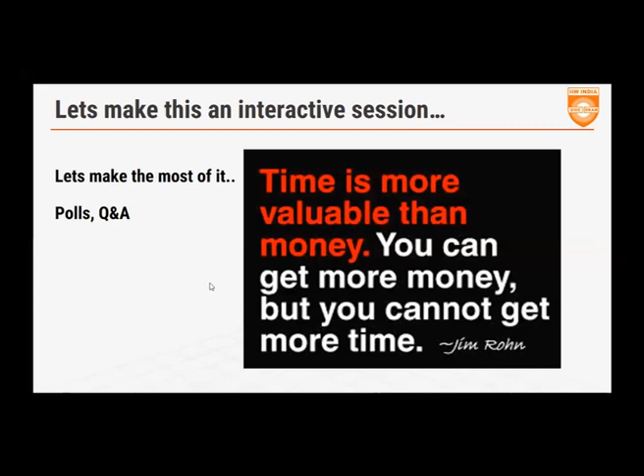Thanks a lot. So we got used to these polls and we know how to approach them. Moving on, we are all here to understand how to increase productivity in GTAW or TIG. The program today for the next hour will take you through how to move from manual to semi-automatic, how to increase speed in your manual welder itself. Then if you were considering automation, what are the reasons you would want to automate, and based on that, the challenges you would face in automation to approach, basic tools that are available for automation, and then putting those tools together - how can we have some simple automations, complex automations, robotics, and we'll also touch upon cladding solutions.

If this also doesn't meet your need for speed, then we do have a process which will take about 100 times faster than the existing TIG methods. We will look at it at the end.

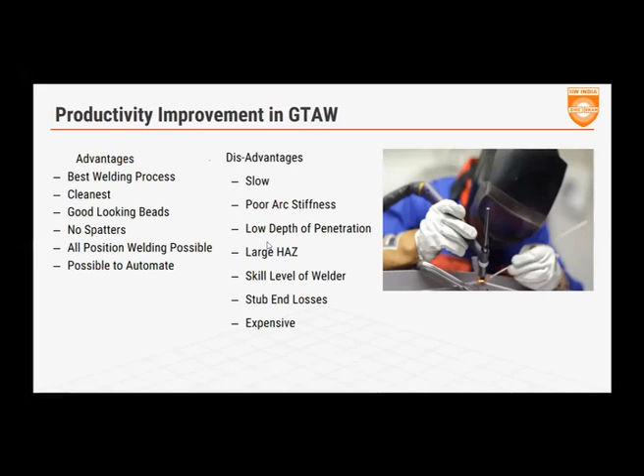Can we make it more cost effective and faster? Let's see. So the first tool that we can look at is, at the moment, what happens when you are welding on the shop floor? What challenges do you face?

The filler metal is manually fed, so the operator is feeding the material by hand, as you can see here. You would use different sizes of filler material for root, filling, capping passes. That means you would have to store multiple kinds of filler rods with you - 1.6, 2.4, 3.2 - depending on the pass.

You would have frequent start stops at the end of each filler wire. When the welder finishes the wire, he'll have to stop, pick up another one. Once that cut length is over, again he has to stop, which leads to a lot of post-process grinding as there are overlaps. Each time you stop and start, that overlap part will have a little high point. You would have to grind it off. And chances of lack of fusion, lack of penetration at overlaps are highest, because whether the upslope, downslope was matched properly, whether enough fusion had happened at that time.

Again, stub end losses, very critical. Your typical cut lengths are 1 meter. If you look at the last 4 inches that the operator cannot reach close enough, he has to throw them away, which means about 100 millimeters for every meter. That's close to 10% of your raw material purchase, consumable purchase gone in scrap. Also, this needs a helper.

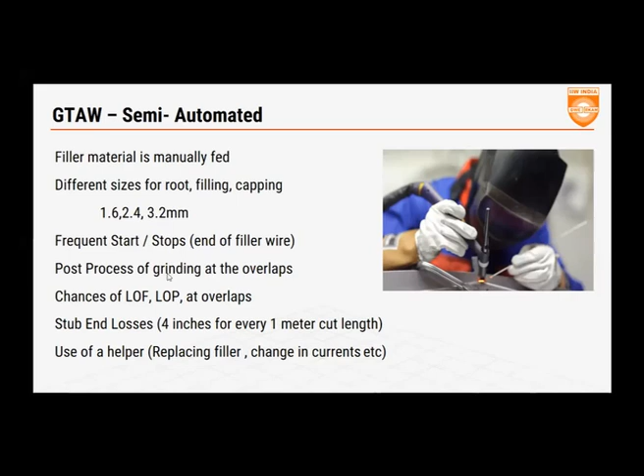Some welders require helpers to help them with the filler wires, some require them to change currents and things like that. Can we somehow help increase the speed?

If you look at cold wire feeders - what are they? They are tools that help you feed the wire continuously like you do in a MIG welding application. However, here the same filler wire that you were welding with in cut lengths is now available in a spool. You would feed the wire through the liner on top of the torch or through a manually held pen. It increases the speed of welding.

It reduces your stub end losses. At the end of the spool, you may have about 8 meters of wire, the length of the liner, which would be nothing more than a couple of grams for a 15 kg spool that could have gone to waste. Whereas in your regular cut lengths, every 10% is going to waste.

It can simulate pulsing. This tool can do everything that your welder has a habit of doing. Welders have a habit of feeding the wire in and out of the pool as they're used to. For more skilled welders, the equipment can simulate pulsing for you - it can start the wire at a speed, pause for a time, start again, pause.

It can be done. The welder feeds in the wire only once the peak current is reached. So once you finish your upslope and have had a smooth start and reach the peak current, the pool is ready - at that time you start feeding the wire into the pool.

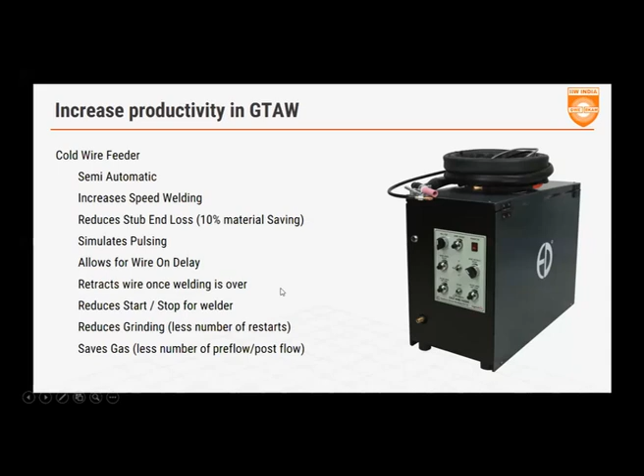Another tool is the hot wire. If you look at this schematic, you have your traditional TIG power source - it can be any power source. One end connected to the TIG torch where your arc happens, and the other earthing connected to the workpiece.

Now, if you were using a cold wire feeder, you would use the wire feeder. The feeder would feed the wire through the pen or the torch tip and enter into the molten pool. This is how it would work.

Now, if you wanted to increase your productivity, you could preheat this wire before it enters the pool. If you preheat the wire, the melting point goes down, allowing quicker deposit rates. The hot wire power source could be connected straight at this point here and to the job. The longer this extension, the more the heating of the wire can happen - it creates a resistance through which the current flows.

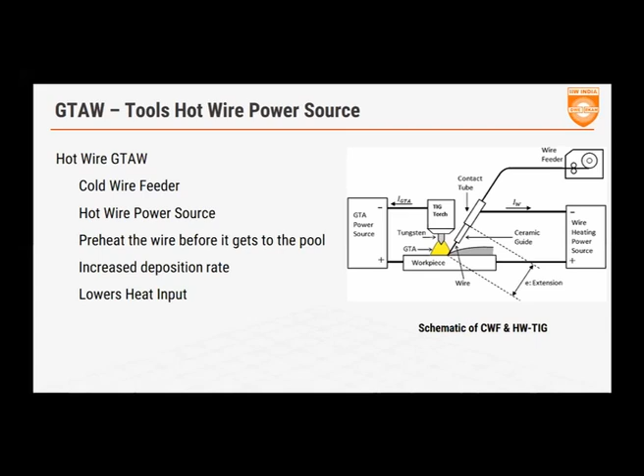This allows you to add wire, and the wire would melt at a lower current or lower heat input. Therefore, the average heat input on the job goes down and your deposit rate increases.

By how much? Typically when talking about manual welding, we're looking at about 200 amperes at best. So you're looking at cold wire fed at about 10 to 12 grams per minute. And when you do the same with hot wire, you're looking at about 20 to 25 grams per minute manually fed, which means you will have a significant difference in your productivity.

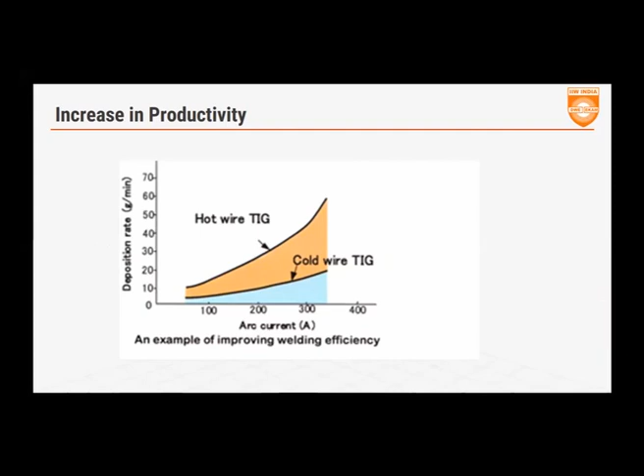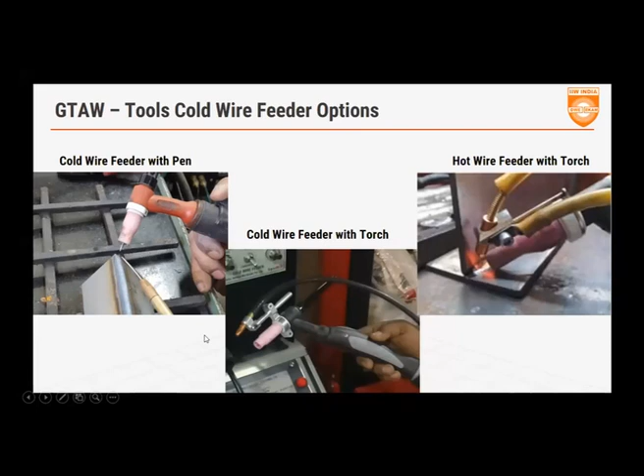As you can see here, the welder is holding the pen the same way he holds his wire at the moment, so there is no change of skill set for the welder. The way he holds the pen and the way he holds his existing wires are the same. Therefore, it makes it very easy for the welder to learn how to use this tool very quickly. Within a day or two's training, he could quickly get up and running.

This gives productivity increments up to 25 to 40%. You could also use the single hand torch if you wanted to, and the welder would have to get trained for it. This would help you get the wire fed directly from one hand.

This is very interesting and important when you're welding in an out of position weld. So if you're welding a pipeline and you have to weld on the 5 o'clock, 6 o'clock position, this gives a lot more confidence and help to the welder, as the other hand is more free.

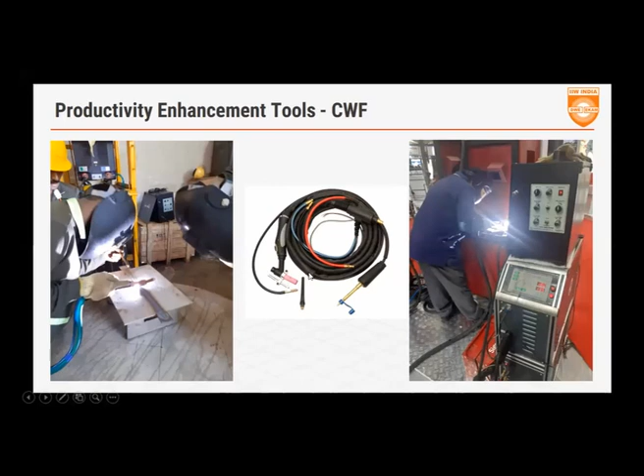This can be mounted very comfortably onto any existing setup of your TIG welding machines on your shop floor. It could be any technology, any of the imported machines, the standard thyristors or Indian machines, or it could be the other older generation machines. This is an independent tool that can mount onto any existing setup and helps you get going in as quick as a day.

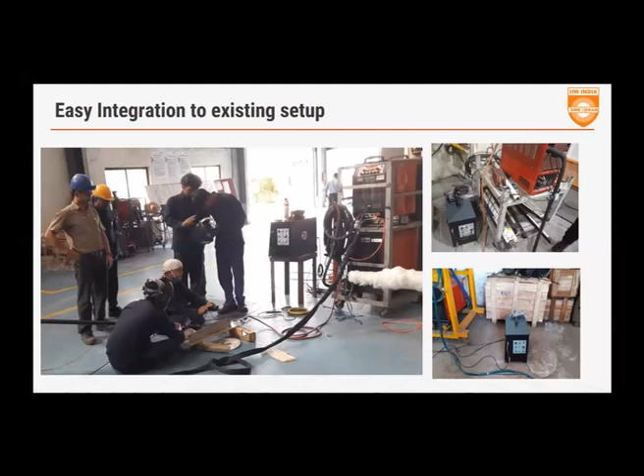So if we were to look at how much productivity improvement is expected from manual intervention or using these tools, you can see a small experiment on about a 150 millimeter length fillet joint. When welded directly by the welder using a 1.6 mm filler wire and a preset current of 138 amps, he could complete the joint in about 110 seconds.

Now, we kept the same current range, we kept the same fillet size, and we introduced the cold wire feeder. The welder was feeding the wire at about 900 millimeters a minute, equivalent to a wire volume of 1.6 at this rate, and the welder could complete the job in 96 seconds. This is because the wire was coming on clean to the job, and 1.2 requires a lot lesser heat to melt than 1.6.

Same thing when we added a little bit of hot wire to it, adding about 40 amps current to the hot wire. You see the increase in deposition, the wire feed rate went up to 1100 millimeters a minute, and the joint was finished in 80 seconds. So a nearly 30% improvement on a 150 mm length.

If you increase this length to about a meter or more of weld length, the number of start stops in the manual process increases because the filler wires have to keep changing. This is where this will be very, very useful and can increase productivity anywhere between 20 all the way up to 40% for the manual welder.

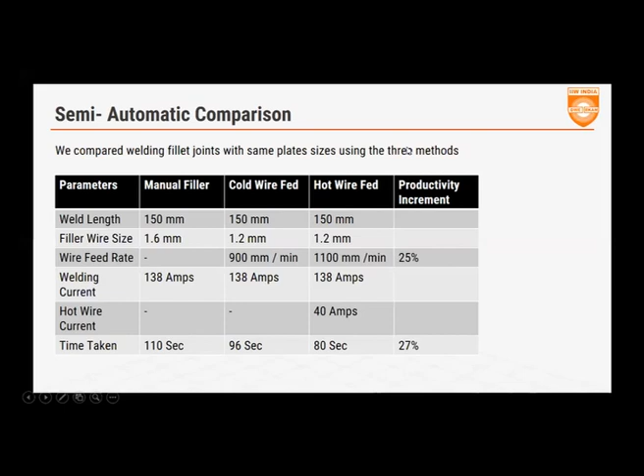I hope this part is clear to you. At this stage, we can take a few quick questions if there are any. Let me see what is happening.

Mr. Subramaniam asked about stub end losses being overcome by welding the new wire onto the earlier one, and also about pen feeders. The typical trick of the trade by welding two wires together will also give you a 2-meter length, but if you're welding for a longer period, the 15-meter spool would help you weld much more continuously than tacking two wires together. You would definitely save on stub end losses, reducing it from 10% maybe to 5%, and that would continuously work.

Mr. Gandhi is asking the difference between cold wire and hot wire. In hot wire, the wire gets preheated before it enters the weld pool. That means you have already preheated wire entering the pool, reducing the temperature, and the current or heat required for it to melt.

Mr. Anil Singh is asking about it without any manual intervention. I think most of these have been answered now.

What is the maximum current that we can use in hot wire GTAW? You can go up to 40, 50. The power sources are allowed to go up to 80 amps, but practically when you go into cladding, this is used much more because the speeds are higher. Typical current ranges of about 40 amps on the higher side would be comfortable.

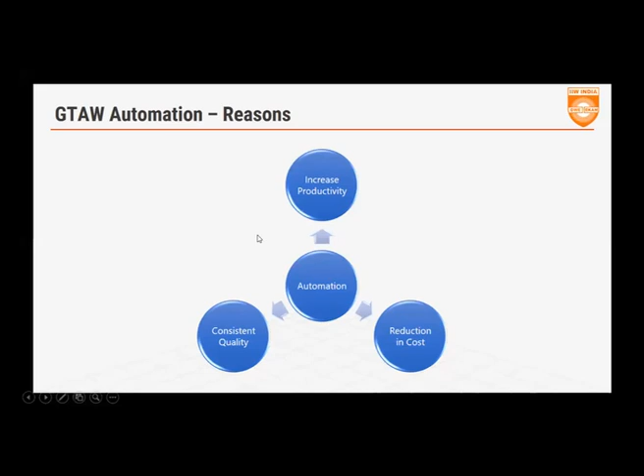Considering these three during your initial phase is very important. What are the types of challenges you will face when you try to get into automating TIG? One is the edge preparation - whether you are grinding or beveling, you have an equivalent root face. What is the tolerance in the root face when you do fit ups? Are there mismatches, ovality, uneven surfaces, or a thin sheet with a bigger diameter like in most distillery sections? You have shells of about 1 to 2 meters, but thicknesses no more than 4-5 millimeters. There you will have a lot of ovality when you put it onto one surface. Or you want to do rectangular rounded edge tubes or hydraulic ports - one tube, multiple ports to be done, such odd shapes to automate.

Excuse me for a second, I'll just have a sip of water. Thank you.

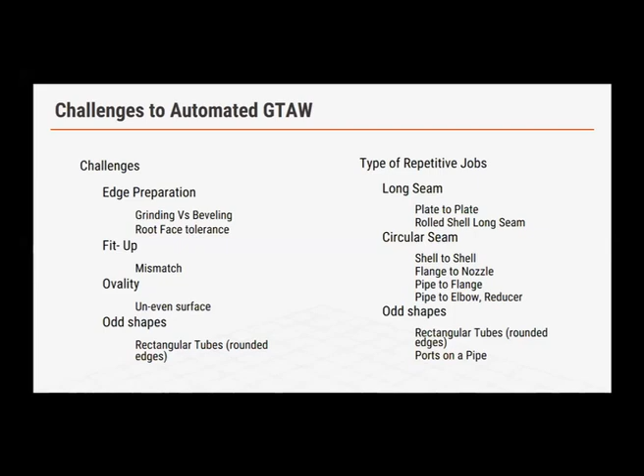So the kind of repetitive jobs you can consider to automate - one is the long seam. If you had plate to plate joints, rolled long seam joints, these are typical long seams which can be automated. Circular seam joints - shell to shell, flange to nozzle, pipe to flange, pipe to elbow, pipe to reducers. Then you have floats, locks, objects which are repeated in nature and have circular seams - they can be automated. And you have odd shapes like hydraulic ports, a classic example, multiple ports, circular but in one line, more than one axis to weld, or you wanted to weld rectangular tubes.

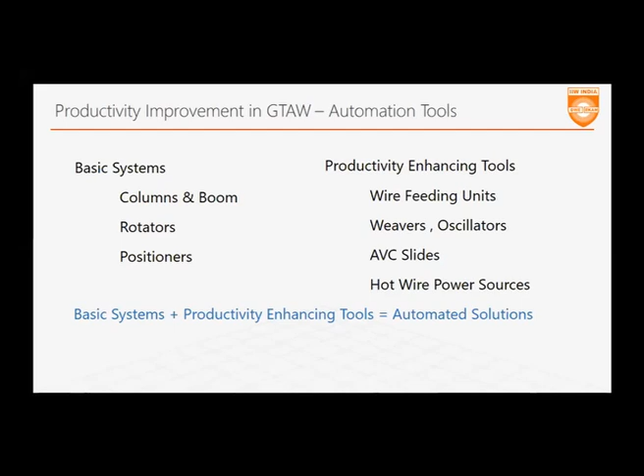So how do you go about automating? You take some automation tools and you have some basic systems. Your basic systems could consist of column booms, rotators, positioners, manipulators - these are the basic systems. Then you have your productivity enhancing tools - cold and hot wire feeders, weavers, oscillators, AVC slides, and hot wire power sources. When you mix all of these together for the right application, you can have an automated GTAW solution for you. Let's look at these tools one by one first.

If we look at cold wire feeders, what we discussed earlier - you have a motor which could be a geared motor, a stepper motor, a servo or a pancake motor, clubbed with a feeder. It could be a 2-roll drive or a 4-roll drive, and you could have single or twin wires that you want to feed through these.

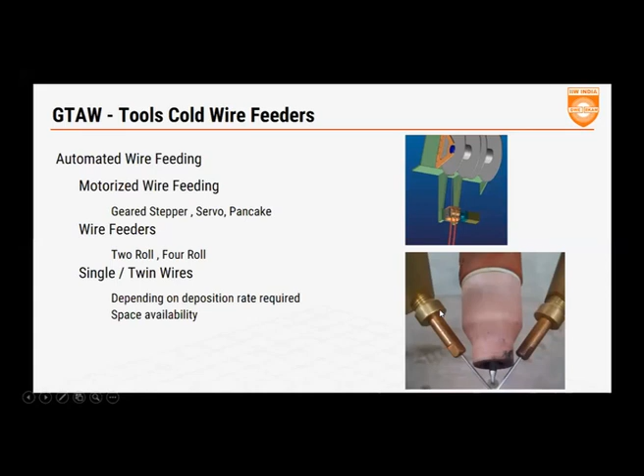Now, if you were to do a twin hot wire, what does that mean? You would have twin wires. The torch is fixed, for example, on a boom, and the job is moving in this direction. Say it's a circular seam and you are rotating the job.

This would be the leading wire that is coming into the pool, just at the outside of the weld pool. This would be the trailing wire, getting inside the molten pool already, well within the center of the pool. This is how the setting would be.

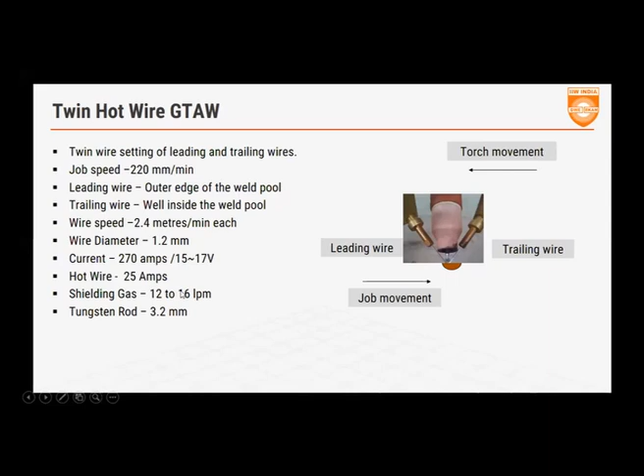If you look at a typical job speed of about 220 millimeters a minute linear welding speed, 2 wires, each fed at 2.4 meters per minute, wire diameters of 1.2 millimeters. Mind you, this is already on automation. Current levels were at about 270 amps, hot wire currents of about 25 amps, shielding gas argon at about 12 to 16 LPM, and tungsten was about 3.2 mm.

What was the result? If you did the same job with only a cold wire feeder: same 225 amps, 15 to 17 volts, 150 millimeters per minute travel speed, wire feed rate about 1.9 meters per minute, which roughly translates to about a kilo per hour. We added just a hot wire to the single wire. By adding a hot wire at about 20 amps, we could increase the travel speed from 150 to 180 millimeters a minute, getting the same bead height, and increase the deposition rate from 1 kg per hour to 1.15 kgs per hour.

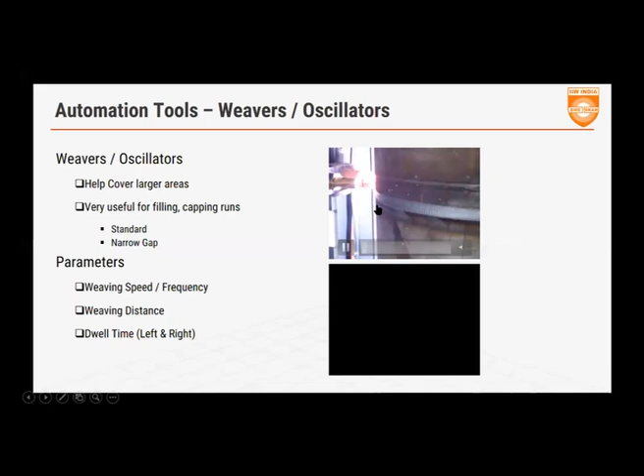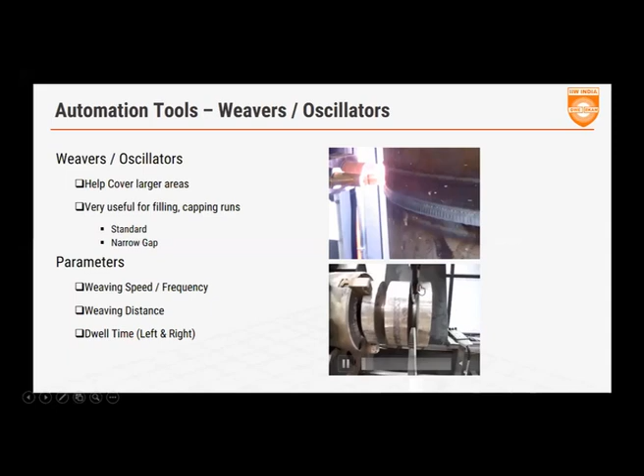So what do we mean by weavers and oscillators? These are tools available for us to cover a larger area. You can see in 2G the torch is moving upward, downward. This is also valid for narrow gap. So if you look at the joint here, you would want to do a narrow gap with an angular weaving.

Now, in both these cases, there are a few parameters you can set as a user. You need to set the weaving speed or frequency at which you want to weave. You could set the weaving distance, what bead width you wanted. And very important is the dwell time, which allows you to avoid lack of fusion on the sides.

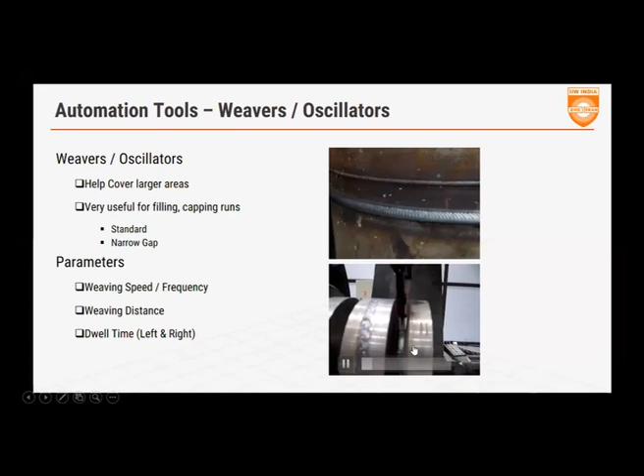So you see when the torch is moving on either side, it's pausing for a second or so - that pause is nothing but the dwell time. It's settable on both left and right, and this ensures you don't have LOFs while welding on narrow grooves, or even when doing multi-layer welds.

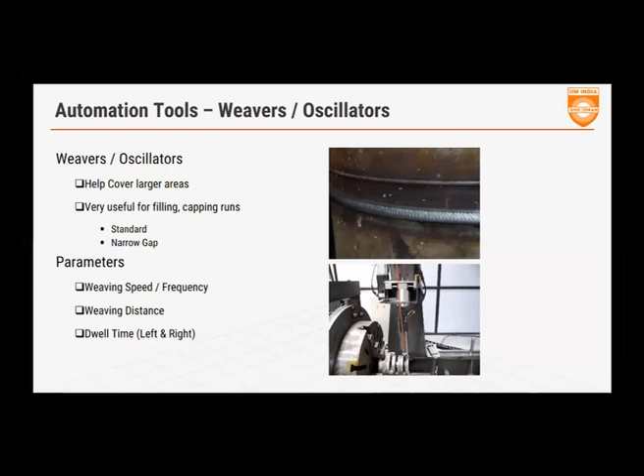The next and very important tool is called the AVC. A lot of you might have heard about it already, and some of you are definitely using it. It's called automatic voltage corrector. It regulates the welding voltage precisely to give repeatable procedures.

Now what happens is, typically when you have a lot of ovality as we were sharing, or uneven surfaces, the distance between your torch and your job would change. As you go through it, it's changing the distance. What happens is we measure the voltage very closely. Those who know what happens when you move a torch closer to the job, your voltage reduces. And when you take the torch away from the job, or the distance increases, your voltage increases.

We capture this feedback, take it into a fast loop system, and on sensitivity index, we control the motor of the slide. This helps you trace any profile that you want while maintaining the same arc gap, which means you would no longer have to worry about your tungsten getting dashed in because the ovality is too high.

If this moved on without the AVC, somewhere along the lines here, you would have the tungsten make a very big gap and it would burn through. And here you would have had the tungsten hit the job and cause damage or require a repair. AVC avoids all this and allows you to do automation in TIG much easier.

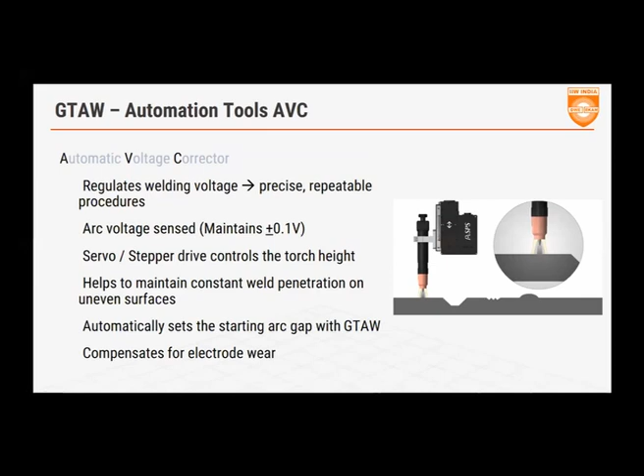Another important factor is it also allows you to compensate for electrode wear. This is very important when you're doing cladding solutions, when your arcing is on for more than 8-10 hours. At that time, if your electrode has worn out, the arc gap will change and the voltage will increase. This will automatically bring your torch closer to the job, thereby maintaining the same voltage that you wanted.

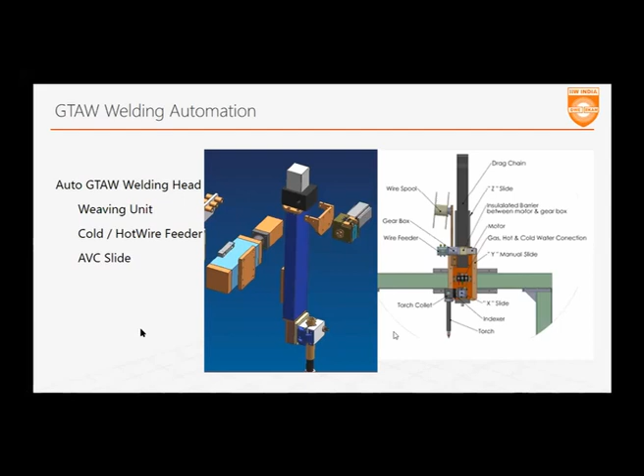Now, this is when your job is over here and rotating, in a 1G position weld. This is true. If you're welding in 2G, your torch would be pointing on this side. This axis would become the weaving axis, and this axis would become your AVC axis, allowing you to adjust the gap from the job while this allows you to weave. So depending on the position of the joint, you can change the axis in your program to change the AVC and weaving roles that you wanted to play.

Very important considerations when you look at automated GTAW welding are: what is the size of the part you want to weld, what is the repeatability of the job, what are the chances of inconsistency in your edge preparation or fit ups. Have you done a time motion study? That means what is important to know is what is taking more time, welding or handling the material. This is very critical when you do any automation. This is something you should understand, and then take your next decisive step, because it will help you understand which next step to take, whether to go in for a robotic solution, or an SPM based solution with single station or multi-station.

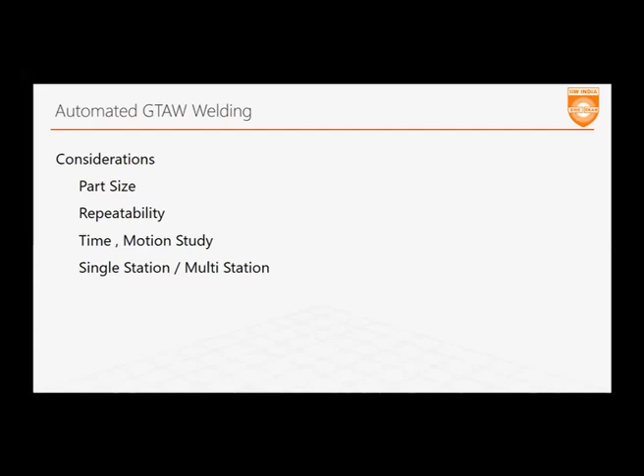We'll see a couple of examples here. I've put in a few slides for straight tube butt welding lines for boiler panel tubes. Similarly, we have done titanium tube to tube welding systems, joining two tubes together. Big shout out to the team from Godrej, who are already present on the chat. I know we've done this for them. And you have butt welders or spooling operations where you can do pipe to flanges, pipe to elbows, reducers.

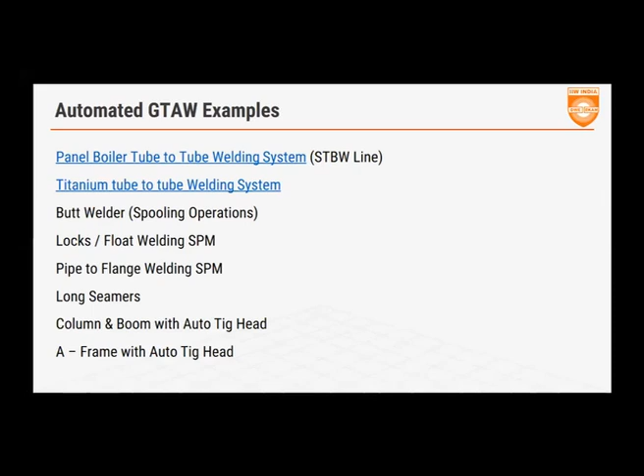You can do locks, floats, welding SPMs. Now, as the parts are smaller, loading and unloading times can be longer, so here we'll see something that can help you save time. Then you have pipe to flange solutions, valve solutions, long seamers, and we'll show you how this goes on to a column boom for an auto TIG head or an A-frame in general.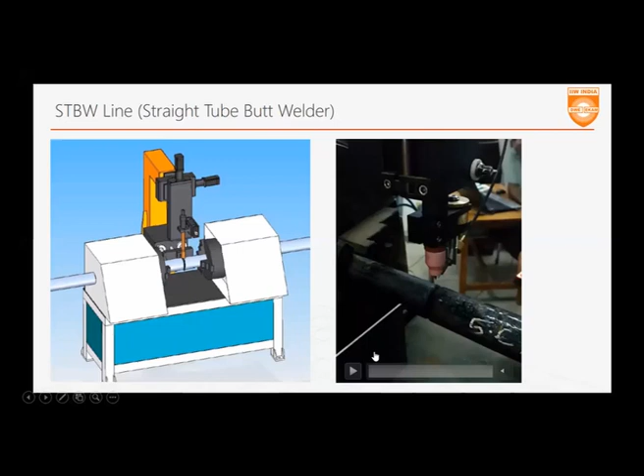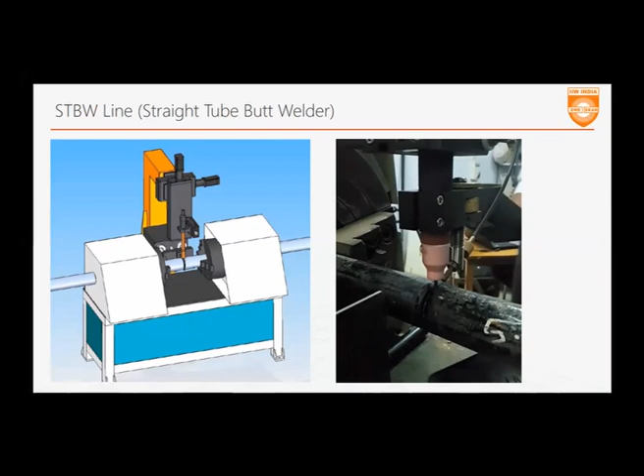So you see a touch retract happening here, wherein the torch is approaching the job. When it touches, the beauty of AVC is the feedback. It tells you that it has reached the destination, goes up by a fixed distance that you want to set, and then starts the arcing. This will repeat itself every single time.

You can have the start point at 3 millimeters, 4 millimeters, depending on the voltage you wanted. You can clearly see that the torch is weaving. You can see that the wire is being fed directly into the pool and that the job is rotating in this direction.

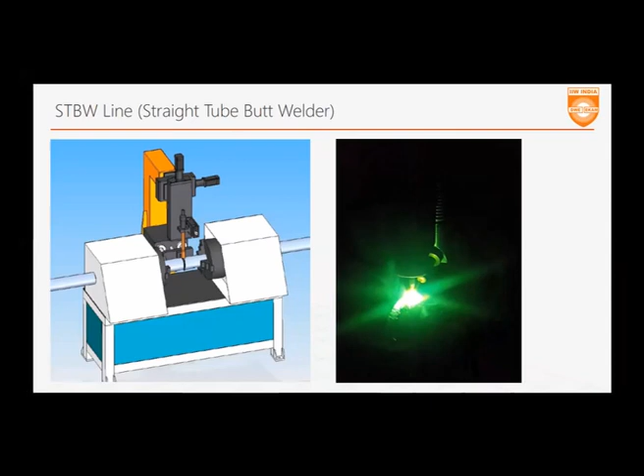Now, as you can see here more clearly, when 360 degrees are about to get over, you will have a slight overlap which you can program up to 5 degrees, 10 degrees, depending on your job. At the end of overlap, you are seeing now a downslope happen onto the job. You can see slowly the current going down and the wire has retracted, thereby not having any inclusion in the sticking of the wire onto the pool itself.

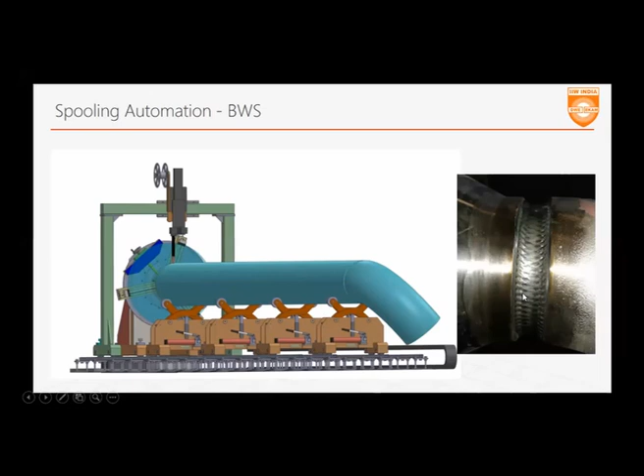Now this is a spooling automation or a butt welding system. This is very useful when you have larger spools, flanges to pipes, pipes to elbows, elbows to reducers, and the entire spooling system. This is one of the beads you can see here welded, one of the passes with the wire, with weaving, beautiful bead here.

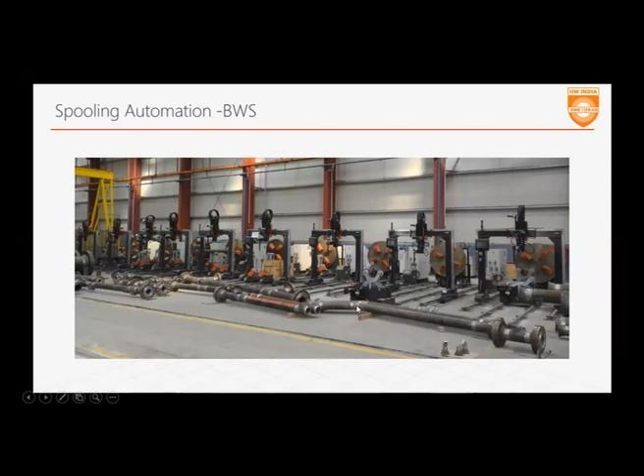You could see a series of maybe about 10 to 15 of these butt welders on the shop floor here. These are the kind of spoolings that we were talking about. So you could do pipe to flange to pipe, these butt joints which are heavy wall thick, and it could help you do them. It could help you do the elbows, the reducers.

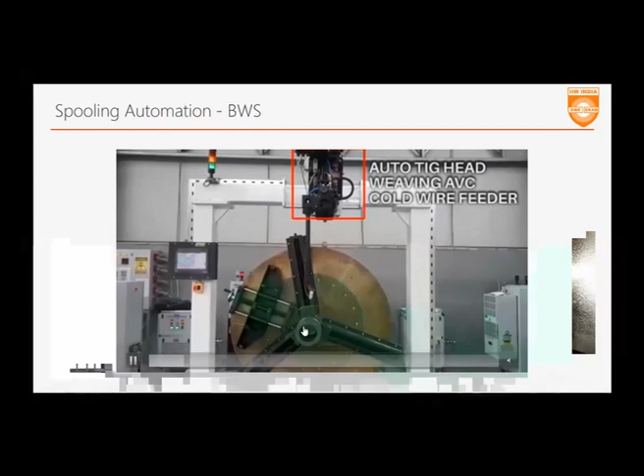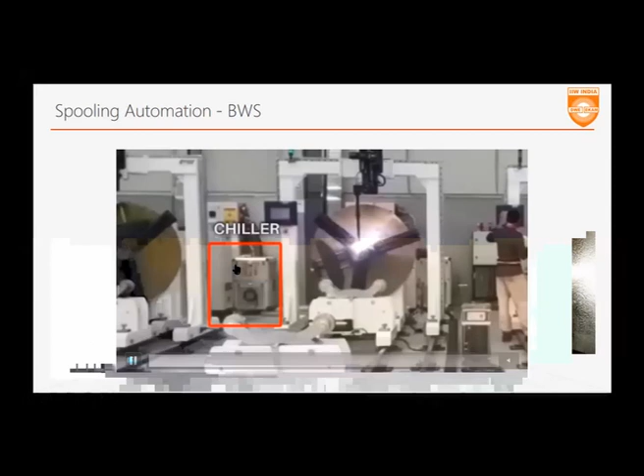How does this work? I have a quick video to show you that. Now this, if you see here, is the 3-jaw chuck which will hold the job for you, the pipe or the elbow. And then you have the power sources, the idlers here, so if you have a longer joint, you can rest the job onto it. The chiller keeps the torch cool.

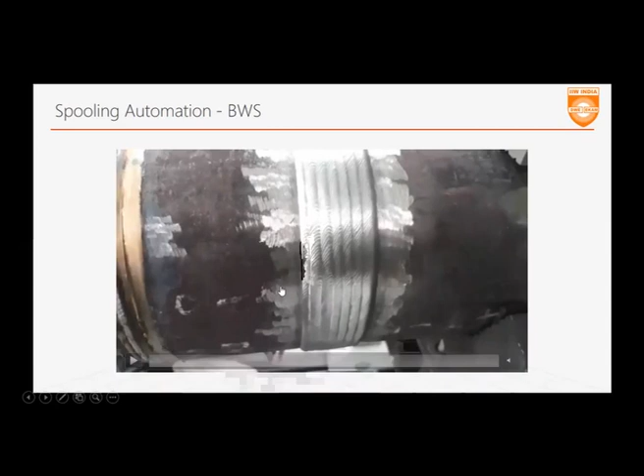Now here is where the torch is working. The operator is just looking at the job being welded. This is the kind of weld joint or overlay you can expect on this. It has pre-programmed, so once you put in the diameter of the pipe, it will maintain a linear speed. Once the 360 degree is over, it would move on to the next one, weld the next run, next run. It will keep doing it on its own with minimum intervention by the operator.

When you're doing multi-pass, when the second pass comes, because of the AVC, it will again maintain the same arc gap and maintain the voltage that you want.

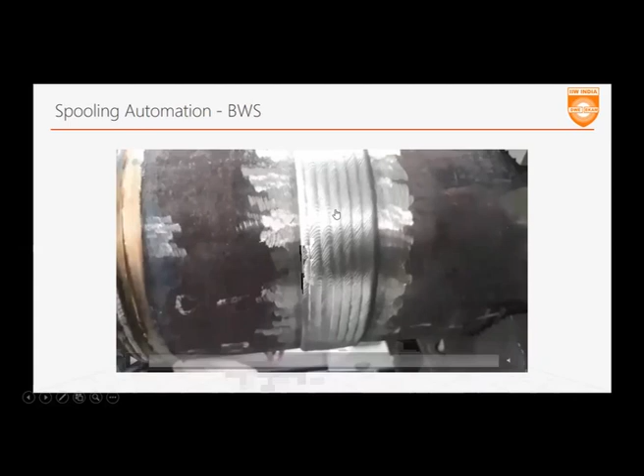Now let's see a pipe to flange example. Now these are two different SPMs. Here you see one where we have raised the entire tailstock to a 45-degree angle. What does that help you achieve? It helps you achieve welding in 1G position.

Again, that solves a lot of your problems of mismatches. Now, if you have welded this in a 1G position and the torch was at 45 degrees, any mismatch or any gap which was inconsistent between the pipe and the flange would reflect in two dimensions, X and Y axis both. When I'm moving it 45 degrees, any mismatch is in the Z axis only, and my AVC can take care of that particular mismatch by arranging or reaching closer to the joint.

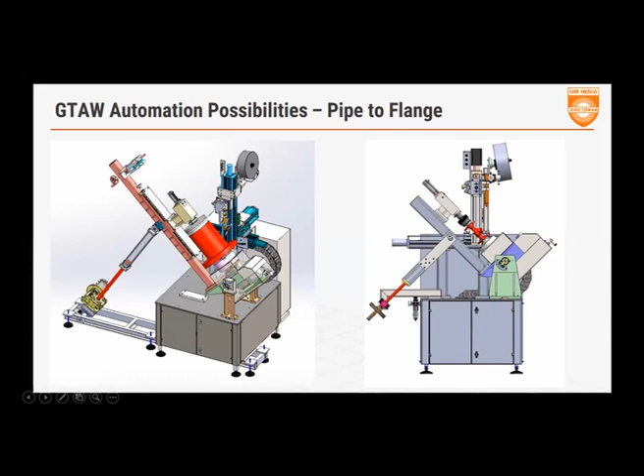Same thing here, you could do it, it's a valve being done. You can see the flange to pipe, pipe to the body, valve body to pipe again, and then to the flange. Two settings, and you can do four joints on it. These two are butt welds and these two are fillet joints.

How does the end product look like? Now this is where you can see you're welding the three pipe to flange joints here, already pre-welded for you. You can see the result here. What if you had a narrow gap, like we saw the valve, it has a fitting coming out of it, the Y coming out of it doesn't allow you a lot of space.

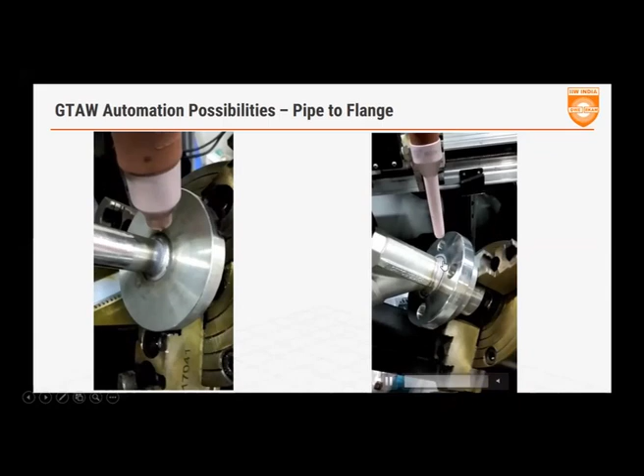So we can have special torches and nozzles for reaching such places. AVC and other tools help achieve that weld joint, which seems difficult to automate, possible to do very comfortably. Let's look at smaller stations.

If you had a smaller product with smaller weld time but higher loading and unloading time, you could load the job on one station. The operator loads it and gives a 2-hand acknowledgement onto the job, which allows it to be clamped. Once clamped, it rotates to the other side, ready to be welded. While the torch goes down, touches, retracts, and starts welding, the operator can remove the pre-welded job, put in the second job, and set it up for welding.

Here you can see a lock being welded, with welding speeds at about 800 millimeters a minute and sheet thicknesses in the tune of 1.2 millimeters. By doing a pipeline here, one being welded and one being loaded, the operator is free to work at an easier rate, and productivity improves since your equipment is never kept idle. It's always occupied.

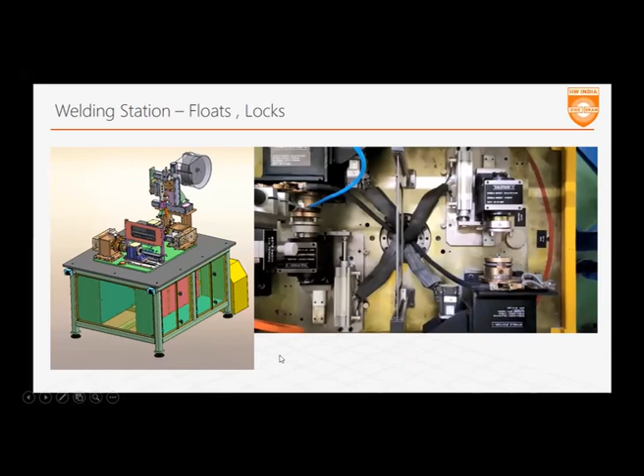This is a typical long seamer. If you were to do plate-to-plate or a shell type joint, this is the kind of long seamer you would have. This axis is the main gantry on which the welding head moves left to right or right to left. On top is the torch mounted, with one axis here for weaving. This axis becomes AVC, and the cold wire feeder is fed through this.

What's interesting in the long seamers is the kind of fitments you have to hold the pipes or plates together, because welding attracts a lot of stresses. It will either push the job away or pull it closer. To avoid those shrinkages, you have to have the right set of clamps to hold it.

This is a pneumatic muscle with fingers all across the length, 50 millimeters each. If you had a 6 meter long piece, you would see about 120 such fingers next to each other. When the pneumatic swells with air, it puts pressure onto the clamp and the fingers hold onto the job, holding it tight every 50 millimeters so it doesn't move. These are copper based for heat removal.

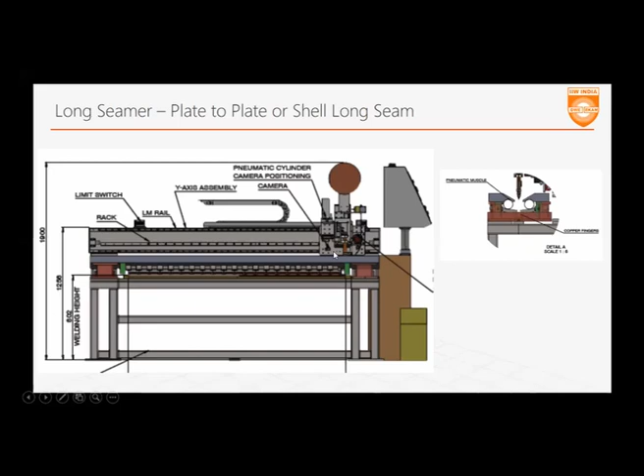You can have a purging base here, and a prefixed groove to fill the geometry of the penetration - all done on this face. This whole length is welded straight on, again with the same three tools: AVC, weaving, cold wire feeder. It could be hot wire as well, depending on your job.

If you had an existing column boom setup, with a trolley, column, and boom, you could mount a TIG welding head on top of the boom face. This is a headstock, tailstock setup. If you had a spider-based system, you could even have simple rotators on the base instead of a headstock, tailstock, which rotate the job. The head does the same thing, welding in 1G position, making life easier for the welder.

As you can see, this is a huge shell, about 3.2 to 4 meters in diameter, being rotated, with hot wire and the GTAW power source being fed directly.

The new advantage of this automation is that the welder and the helper now become one. The welder has the convenience of not having to handle a cockpit of multiple stations. He handles one tab, one remote to control his wire feed rate during welding, his AVC controls, his weaving length, and his rotational cycles, all on one panel in front of him. Makes life much easier for the welder.

We can add a weld camera to this, which allows the welder to see the weld joint and, during welding, see the pool while sitting in the convenience of an AC cabin or down by the bench, not necessarily right in front of it.

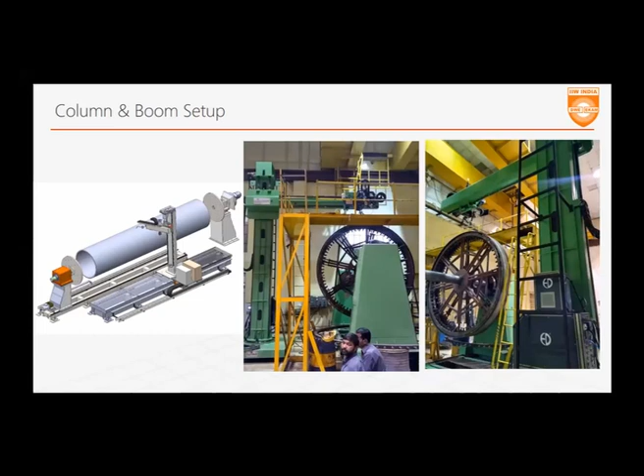This takes away the fatigue from the welder and allows him to do repeated jobs at a higher speed.

The same long seamer could have the TIG head mounted onto an A-frame, as shown here. So if you had a pipe with a flange, a reducer, another connection or a socket to weld, you could move the head very comfortably. You could weld long seams on this. You had your shell rolled, put it on the idler, set the seam right, and then move the torch from one end to the other while welding the long seam.

You could have weaving in this axis, as you can see, and AVC in this axis for the long seam. To do the circ seam, you would have weaving in this axis, and AVC here. This you can see is a 300 nominal bore pipe with 8 mm thickness being welded in two passes.

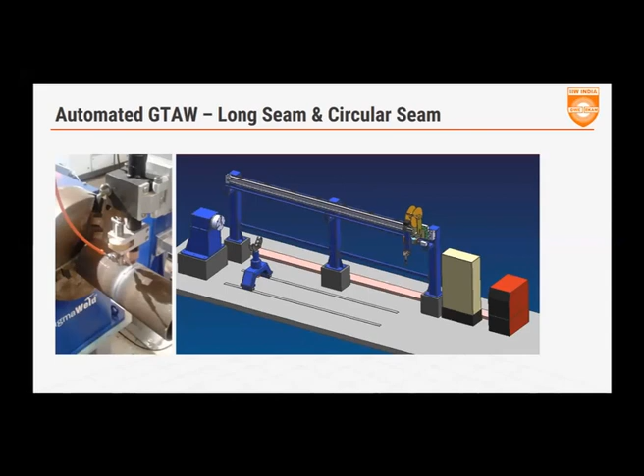Root with the filler wire, and then the capping. Ideally, in manual welding, it would have taken 3 passes.

Moving on to cladding stations, we have 4 kinds available for cladding overlay: the vertical cladding station, horizontal, universal, compact cladding stations, and you can also have RTJ groove cladding stations.

This is a vertical one. You can put the job here, the job rotates, the torch goes in and welds at every end. Again, AVC, weaving, cold wire, hot wire fed, single or twin wire.

This is the beautiful machine called the Universal Weld Cladding Station. As you can see, this is the positioner or rotator in zero position when working as a vertical station. If you wanted to do a horizontal job, you could raise the positioner up by this hydraulic arm, and it would become 90 degrees.

You could load the joint. This would swivel down here and go straight inside the job and do the work. Welding, either a butt weld, ID cladding, or anything could have been done by that head. Again, same all three mechanisms. The beauty of these systems is they can interchange the AVC and weaving systems as they go along through the program itself.

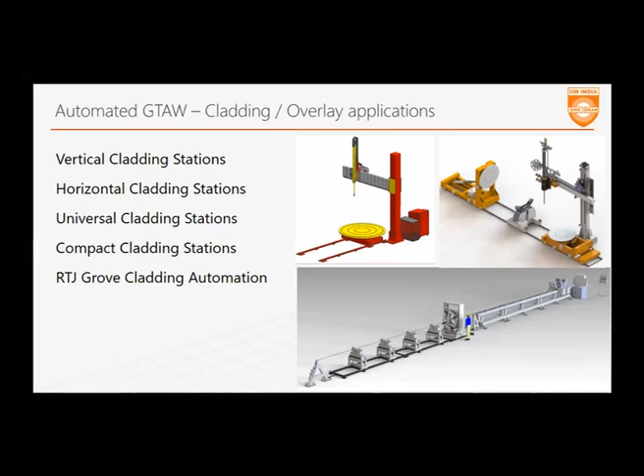Then we have a huge horizontal cladding station here. It could be 3 meters, 6 meters, 12 meters. You can have single head, twin head, quad head - all possible depending on the job you want to do.

Let's look at a vertical cladding station. You can do jobs like elbows. You can see here very small grooves, so for a 2-inch ID, 42 mm, you could want to clad, you could do that. You wanted to do your flange face and the bores, you could do that. You want to do your T-joints, you can do that.

These are all overlaid with different materials, Inconel, Monel, stainless steel, onto the base material that you wanted to clad it with.

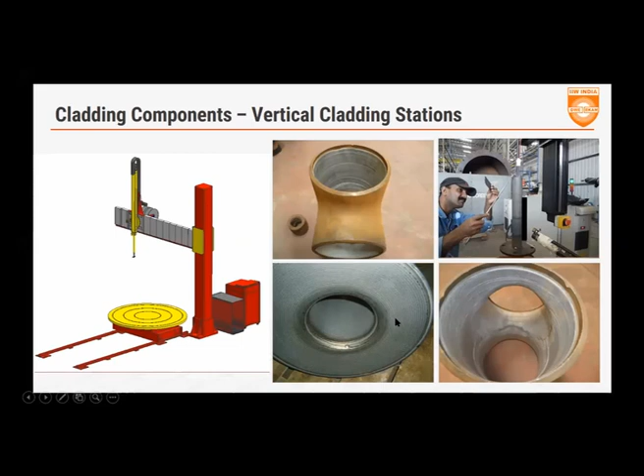Similarly, if you wanted to look at ID cladding, these stations are single and twin pipe. These are some of the cladded pipes already. As you can see here, this has already been clad, beautiful, singular layers, same height, very good to use at the end of it and easy to analyze.

Now, this is a multi-head station, you can see one torch being active here. You can see a dark patch, then you can see the second head. The beauty of these systems is imagine you want to weld a 12-meter long pipe and do ID cladding on it. If you did it with a single head, you would have started from one end and welded 12 meters continuously, resulting in disproportionate heat input on both ends, or you would have to start and stop at different lengths.

You put in a twin head, that means you weld from 0 to 6 meters on the first head, 6 to 12 meters on the second head. You get a more balanced heat input on both sides, and you can complete in 6 meters what would ideally have taken 12 meters.

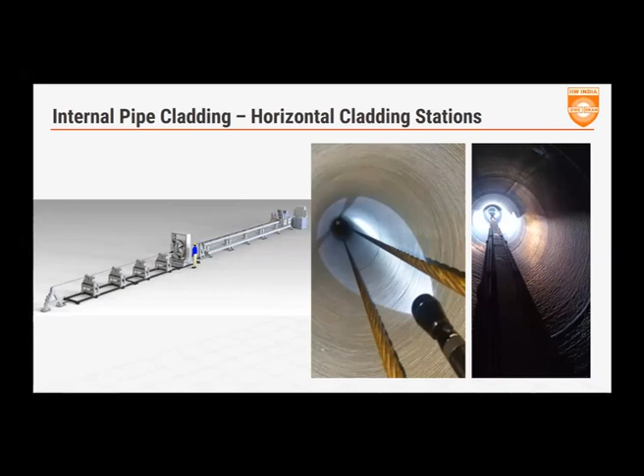Now we add a quad head to it, meaning you have 4 heads on the same station. One 12-meter long pipe could be welded in 3-meter segments. By the time you finish welding 3 meters, ideally you would have welded a 12-meter long pipe. That's the kind of productivity enhancement you can have over there.

We've covered a fair bit of automation where we have seen increase of productivity upwards of 100%, and upskilling of the welder, where the welder now becomes the operator.

You can have a time motion study in place to decide which of these would be more useful for you. It could have evaluated your welding time versus handling time. If you do that, you would know whether you need a multi-station or a single station is better for you.

And did we say overlay? Because overlay is a topic in itself, and I know I've covered very little of it. So while I take more Q&As on this, let me launch one quick poll to know whether you guys would like to have another session on cladding itself.

I'll take a quick Q&A. Is automation systems 4.0 compatible? Yes, data monitoring and documentation happens, Mr. Jinesh, that is true. Seam tracking is possible on the long seam machines, Ashok Kumarji, yes it is possible. There are mechanical seam trackers and there are visual seam trackers.

Mr. Darshan wants to know what is the minimum size we can weld overlay on an elbow. We have done up to 3 inches of an elbow. I have a video for that, and I can share it with you later.

Minimum ID pipe can be done from inside. If you were to do a very small pipe, say below 5 inches, I would recommend doing them on a vertical cladding station or a universal one. If you wanted to do anywhere above 5 inches and the lengths are up to 6 or 12 meters, you could do it on a horizontal one.

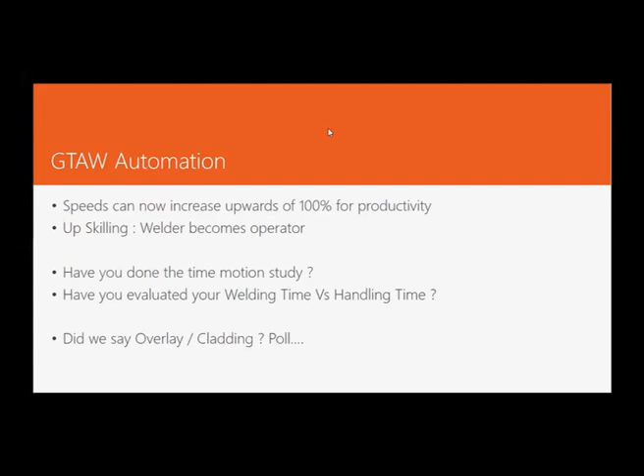If you wanted, has this met your need for speed, if I was to ask? Or would you like to have much more speed? If you wanted to do much more speed, we have a process for you which is the latest technology, called accelerated TIG, we call it SWAT, based on keyhole technology. I know I have taken up the time, but I request you guys to stick around for another 10 minutes, I promise you it will be worth your time.

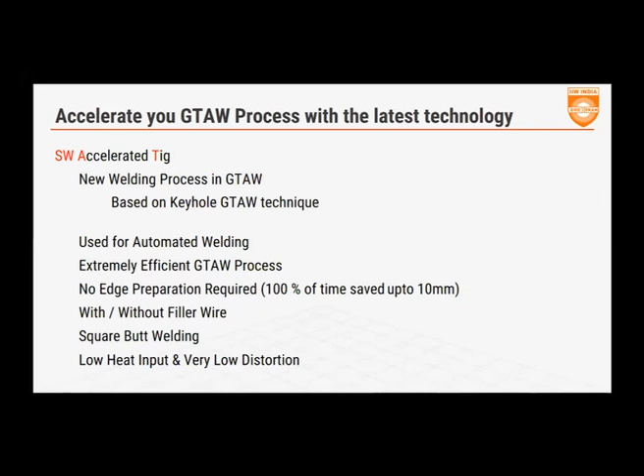Now if you look at the SWAT, it's used for automated welding only, an extremely efficient process. You need no edge preparation, it can be done with or without filler wire. It's a square butt welding, very low heat input, very low distortion. What do I mean by that, and how does this work? It works because it's a variant of keyhole technology, meaning it punctures through the entire material in one go and carries through the molten pool all across. I'll show you how: it works because we concentrate the arc, make it much more concentric, constricted, more focused on a smaller area, and it gives you much deeper penetration.

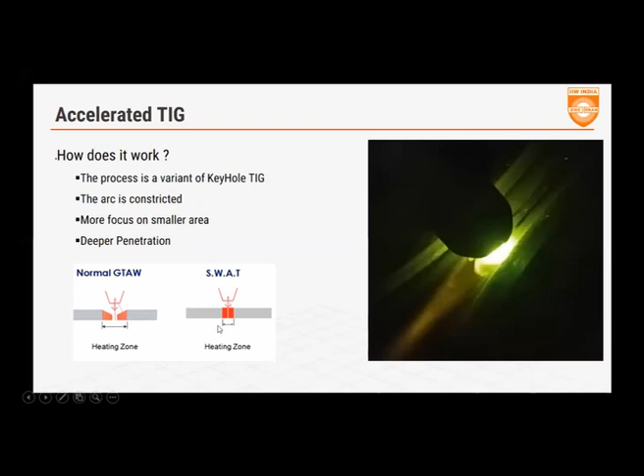If you look at the heat zone of a normal GTAW or pulse TIG versus that of a SWAT, you can see a much smaller, much more focused arc. How much focus? Look at the arc force level for the same levels of current and voltage.

So if you were doing a pulsed DC TIG between 100 and 130 amps peak current, base current at 100, net effective current at about 110-115 amps, you would have had 9.8 volts. The arc force available here is about 3.2 millinewtons. The weld bead depth would be 2.47 millimeters, and width would have been about 7.61 millimeters.

When we did the same thing with SWAT, the arc force, given the same current and voltage, shoots up right from 3.2 to 9.2. It's almost 3 times as powerful as a normal TIG arc force.

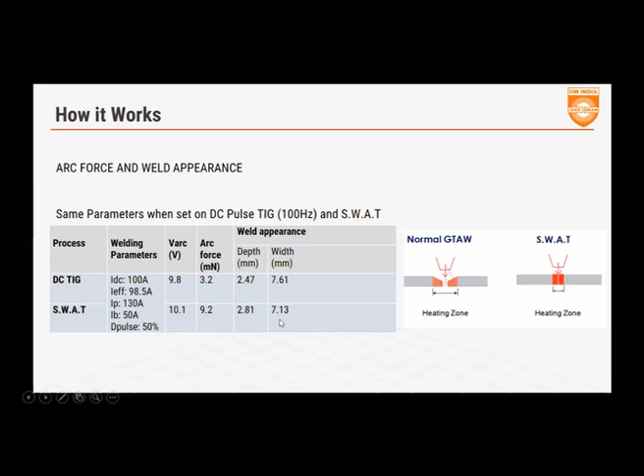But it's still a TIG process. Look at it - the depth of penetration goes up by 20%, width reduces by 10%. You have a very much focused arc, and it allows you to weld in one go. This is the kind of cross section you can expect.

We'll see much more as we move forward. Just to give you a schematic idea - two plates, butt joint put together. When you start welding with the SWAT process, the arc becomes very concentrated. Because of the concentrated arc, it creates a keyhole throughout the thickness.

The plasma and the gases are released from the bottom. As you move in the direction at high speed, the pool is continuously held on its own - you don't need a backing layer at the base. It works without it, and it forms a typical wine glass profile. No edge preparation was required to do this.

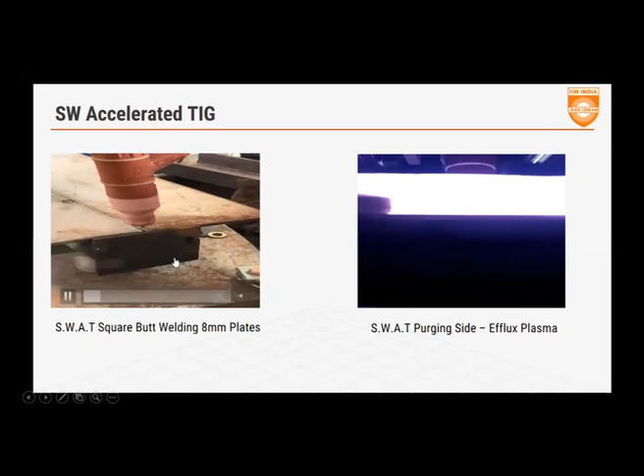So can I show you quick videos? If you can see here, this is a typical 8 millimeter thick stainless steel plate. You can see no edge preparations done. It's simply put on top, and the torch is mounted on a simple column boom. We'll get the boom to move at about 400 millimeters a minute.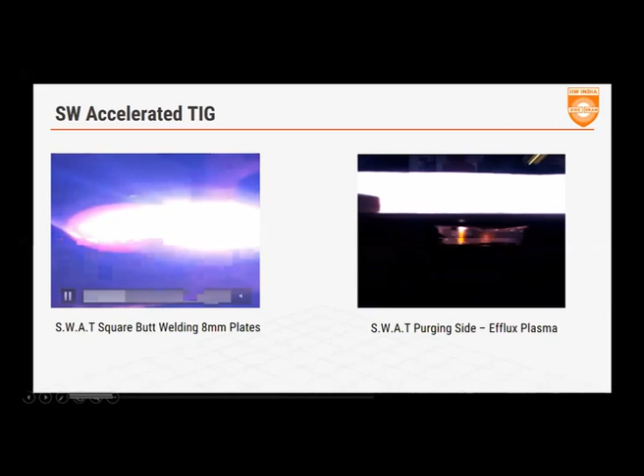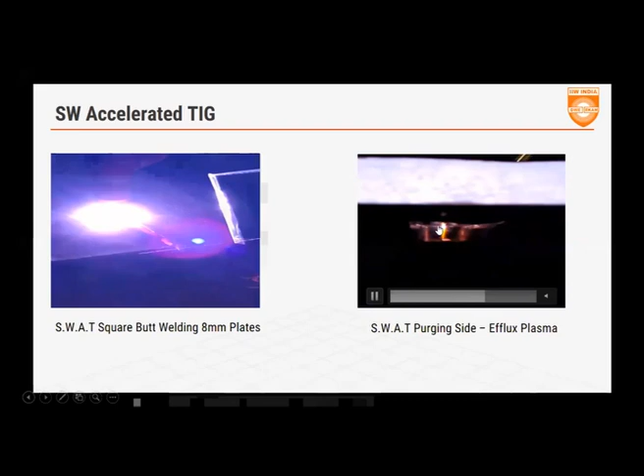On the other end, if you see this video here, what is happening on the other side - you can see the efflux plasma exiting, all the gases coming out. The consistency of this plasma tells you there's a very even penetration happening all across.

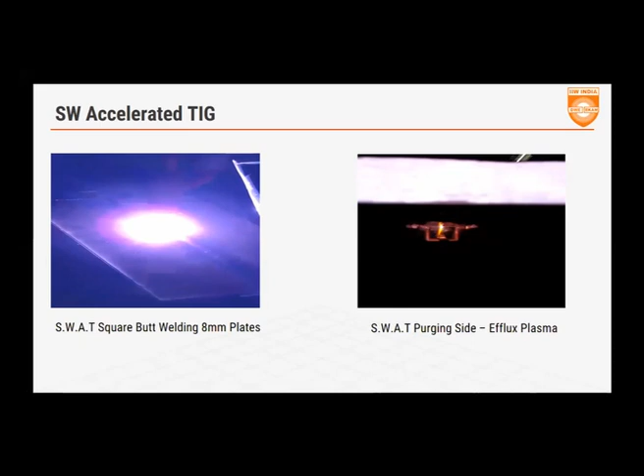And when you go into downslope, this is what happens - you're reducing current, your plasma is going off, your keyhole is shutting, and then you stop.

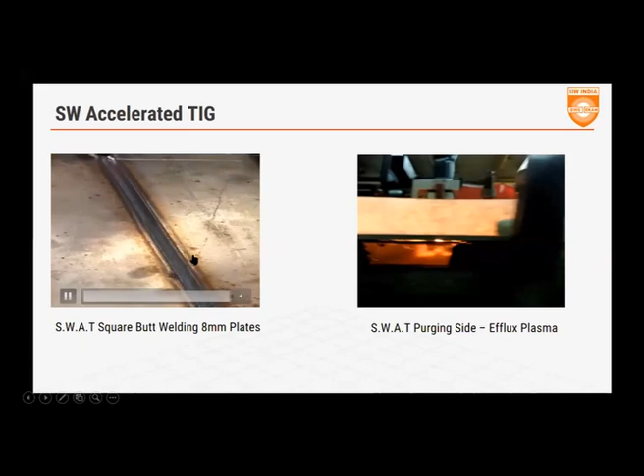This 300 millimeter long plate took less than a minute to finish welding. We welded at close to about 400 millimeters a minute. And this is the kind of weld joint you would get - no edge preparation, no undercuts, beautiful joint, no wire fed on it either.

The applications can be wide. It can be used for long seam, circular seam, tube mills.

What kind of materials can you weld with this? Stainless steel, definitely up to 10 millimeters. You can do square, but no edge preparation required. Duplex stainless steel, you could do up to 10 millimeters. Titanium, we have done up to 12. Nickel alloys up to 10. Stellite, we have tried stellite alloys up to 7 mm. We can do higher - we have much more current available, but we didn't have the material at higher thicknesses.

Carbon steel - we don't recommend this process heavily for carbon steel or mild steel, simply because the batch-to-batch variation is pretty high in terms of content, and that leads to inconsistency in carbon steel. Whereas in stainless steel and any sluggish material, this process works beautifully.

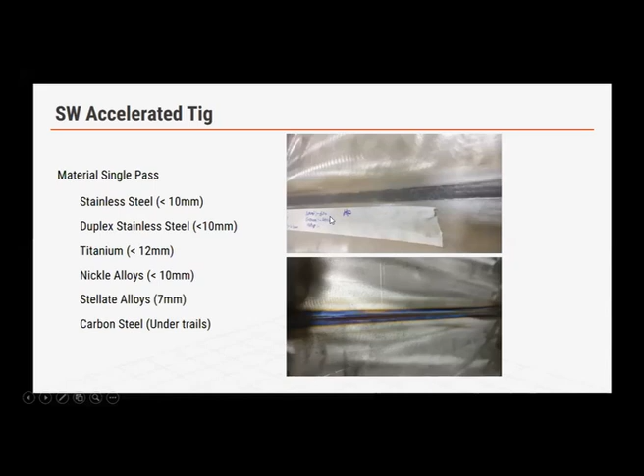As you can see, this plate here welded at about 400 amps, speeds of about 650 millimeters a minute. What are we talking about? We did some trials on Hastelloy C276 material, which is a nickel-based alloy. Thickness was about 6.5 millimeters, speeds of welding 550 millimeters per minute.

Stainless steel, we've tried right from 2.72 up to 8 to 10 millimeters. As you can see, the speeds go from as high as 815 millimeters a minute on the tube mill, to about 400 millimeters a minute on plates and tube mills for 8 mm thick stainless steel 304L. We also tried alloys like Weldox, and we were able to achieve beautiful welds at about 400 millimeters a minute, no edge preparation required.

Again, there was a question asked in the pre-asked questions - what happens if you use a higher amount of hydrogen. There are typical allowances: more hydrogen means more heat input, but it also means it's a combustible gas - it can be explosive. It's not recommended to use over 8 to 10%. Your mix should be between that. There were other questions which I'll answer a little later.

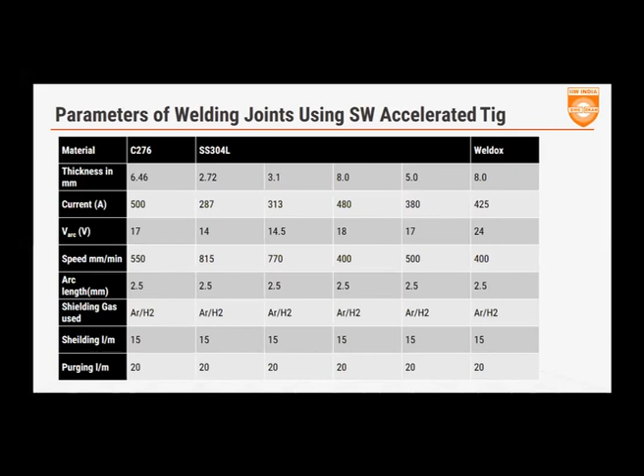If you see the case study on tube mill applications, typically tube mills use a plasma plus TIG combination, so they have TPT or TP as a combination. The plasma makes the keyhole, the TIG fills it up. You have a filler wire addition required to meet the capping needs. 8.5 mm thick, 12-inch diameter pipes are being formed at about 175 millimeters a minute on the tube mill with a plasma plus TIG combination.

When we use SWAT, we were able to use a single TIG torch, single process, no additional filler wire, and we got speeds up to 300 millimeters per minute on an 8.5 mm thick tube. This is that pipe here.

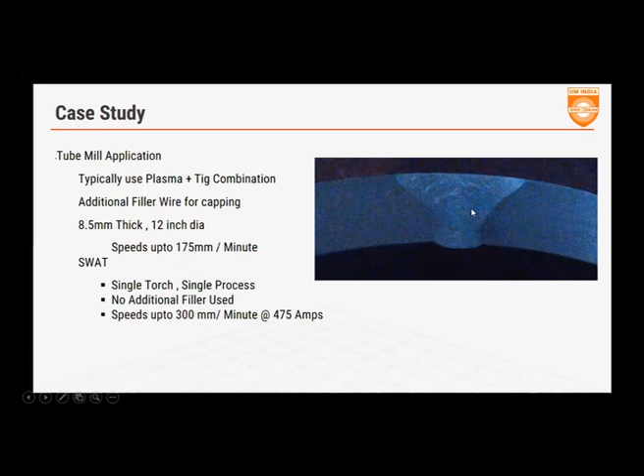Now if you look at the beads here, these are the kind of bead weld penetration consistency you can get. This we did back to back. About 5 tons of material was produced. Each one of them passed the RTR needs, the flaring needs, the bends, whatever other tests, all are compliant. This is a 5 mm thick pipe, about 5 inches, 530 millimeters per minute on the mill. This is the kind of cross profile you can get.

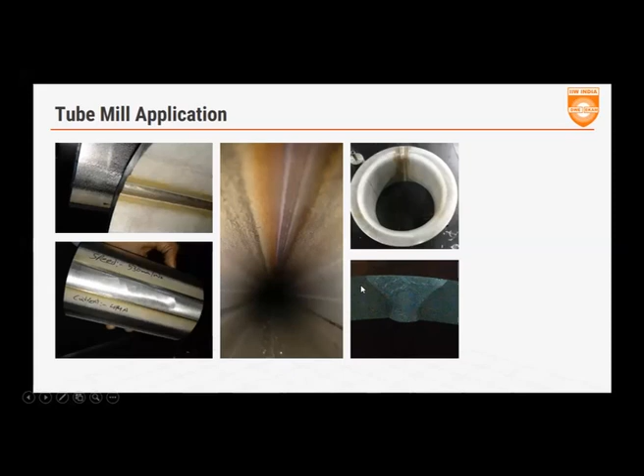On the tube mills, there's a word of caution. They have something called near weld thickness, which needs to be equivalent to or above a particular level. But in tube mills, the tolerance allowed is about 12% on the thickness, so they typically use a lower thickness material. So filler wire is suggested or recommended when you have higher thicknesses to take care of your near weld thickness. Rest, otherwise, from the joint strength, there is no problem.

If you were looking at long seams, we welded about a 1 meter plate, 8 mm thick, SS304. If you were to do a manual GTAW process, the operator would do the edge preparation first on both sides, make the V grooves, get the two plates together, tack weld them, then do the root weld, followed by the hot pass, and then 2 layers of capping pass, fill up and capping. This would have taken about, normal manual speeds are about 55 millimeters a minute. This would be 4 meters of weld because there will be 4 passes. You are looking at something like 72 minutes of weld time per meter. And that total time means 102 minutes to complete the job with edge preparation and welding.

Same if you were to do in an automated TIG process with cold wire at about 100 millimeters a minute, you would reduce the number of passes from 4 to 2 because you would use weaving and a multipass with a cold wire feeder. You could do it in 2 passes with an average speed of about 100 millimeters a minute, completing it in 20 minutes. Edge preparation would have still taken 30 minutes. So this would have been about an hour's job to do a 1 meter long weld on an automated GTAW.

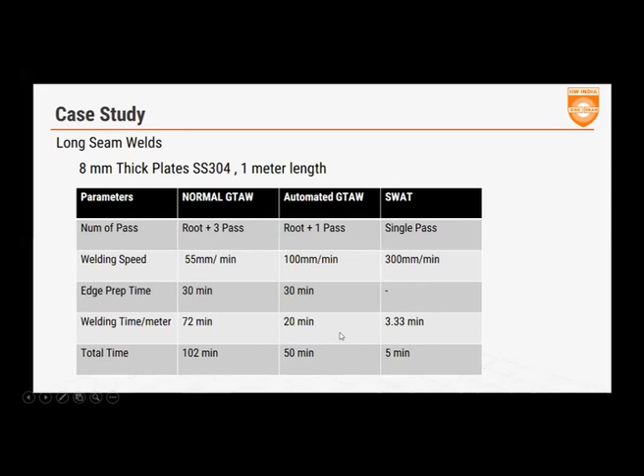In SWAT, with a single pass at a speed of about 300 millimeters a minute, no edge preparation required, maybe about 2-3-5 minutes of setup time, 3.33 minutes of weld time, you can complete the same job in 5 minutes. You can look at the jump in productivity you can expect, right?

This is nickel alloy C276, 6 millimeter thick, 6 meter long plates. This is the pre-tacked version where it was not welded. This was put onto a long seamer with a hydraulic clamping station, and then this was welded at speeds of about 400 millimeters a minute. They welded the 6 meter long joint, 6 mm thick, in under 15 minutes.

I hope I'm stressing this point enough. They welded a 6 meter long joint, 6 mm thick, in a single pass under 15 minutes. You can see the penetration on the other side, and this is where you had the top layer. If you wanted to cap it, you could have one more layer on top to do a capping because this will give you just a flush or near flush finish. If you wanted to add one more layer with filler wire, it would still have taken you much lesser time to do the job.

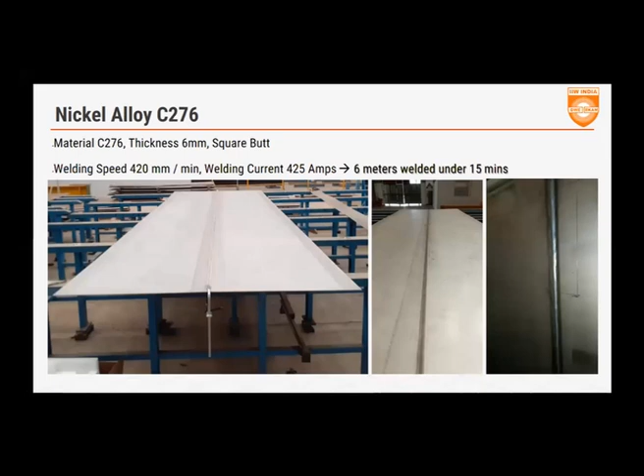As it's a variant of GTAW, it falls under ASME Section 9. All tests have been conducted to prove this process with stainless steel, titanium, stellite alloys, and nickel alloys, and we have seen this pass through with flying colors on the tensile test, root bend, face bend - all these tests compared to Section 9.

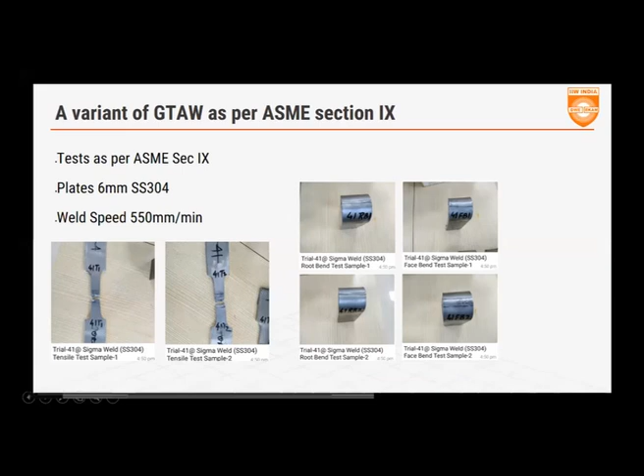I must say, yet to do are the impact tests at minus 130. Impact tests are yet to be done. However, the initial findings on the hardness and other things are all good, and there is no problem there.

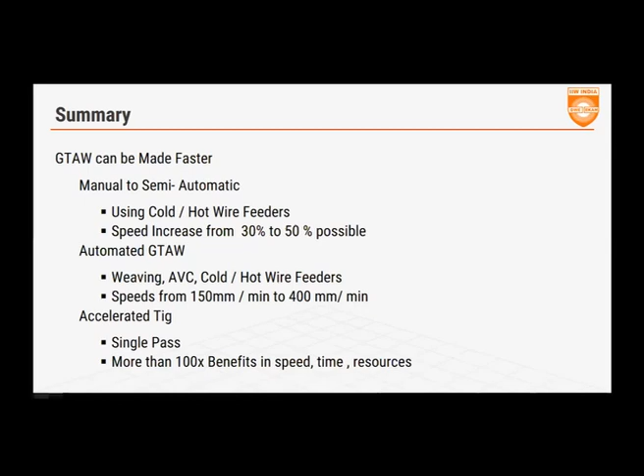I'll just summarize the session because GTAW could be made faster. We saw from manual to semi-automatic, you could increase speeds by using cold and hot wire feeders from 30 to 50%. Automated GTAW, you could cover weaving, AVC, cold hot wire feeders and take your speeds from 150 millimeters to 400 millimeters a minute. And then you could have gone into SWAT, which is accelerated TIG, and have multi-process benefits. I would thank you all for your time and would open the session for any questions you had.